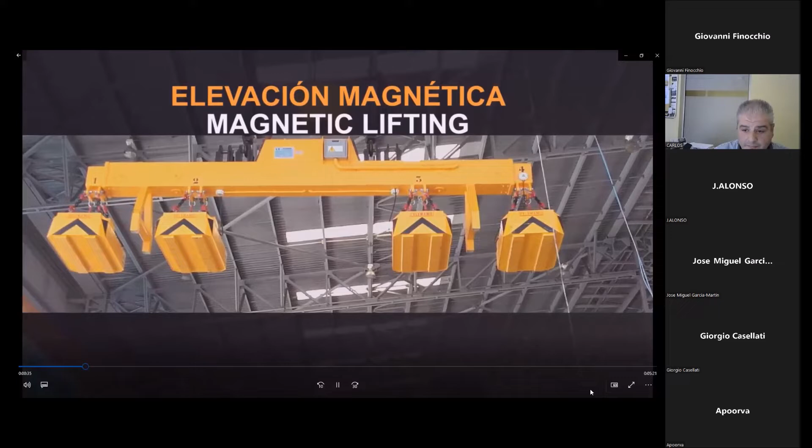So down in the bar, okay. You can see the video now. Yep. Okay.

First, I would like to speak about my personal experience. I graduated from university with a Bachelor of Engineering in the field of electronics. After 2 years, I was working for a company related to electrical industrial assemblies. I obtained a job interview with FELEMAMG, and it went well, and in a short time, I started working here.

Our work in the sales department consists of close contact with the clients. They usually call us with a problem which they want to solve, and we try to give a solution with some of our products.

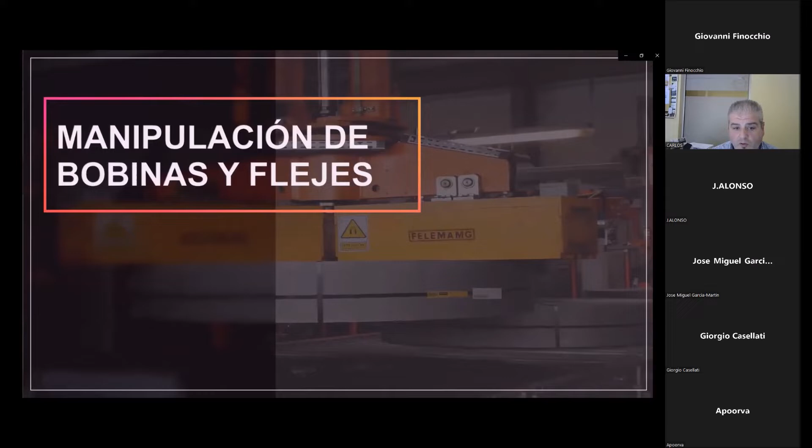These projects include a first technical advice with a visit or a virtual meeting, and after that we study the project and propose to the client a technical solution, which may be a series product or a new product designed especially for their case. This proposal includes a technical part and an economic part too, with all the prices and conditions.

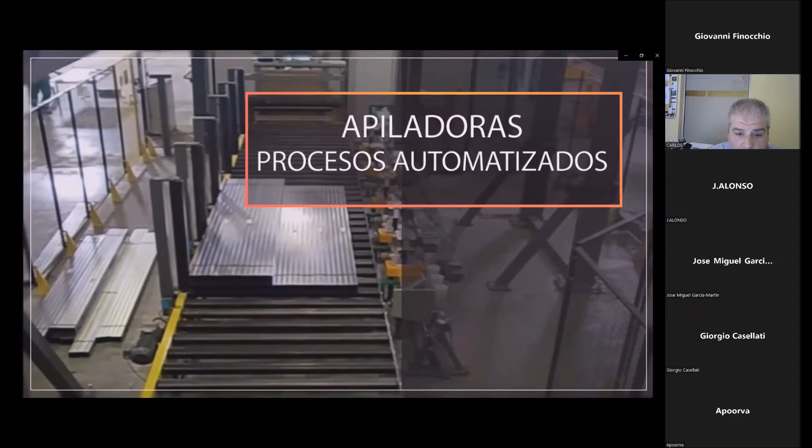If this project is carried out, we continue with the project all the time. This includes a lot of emails, phone calls, documentation, manufacturing reports, drawings, and so on. After that, I hope you have a notion about our job.

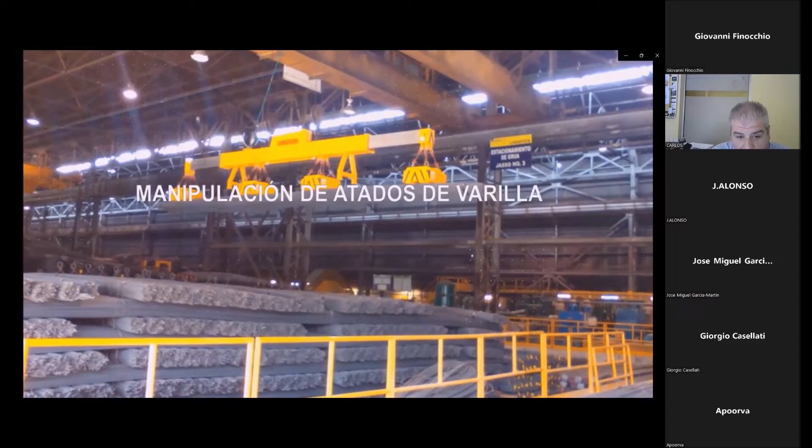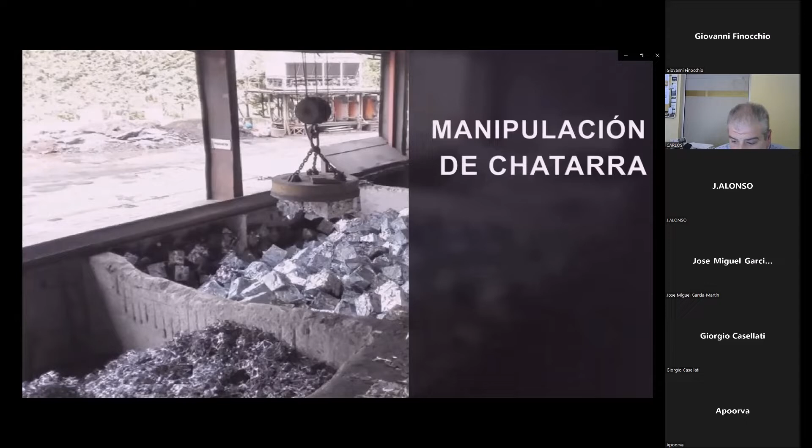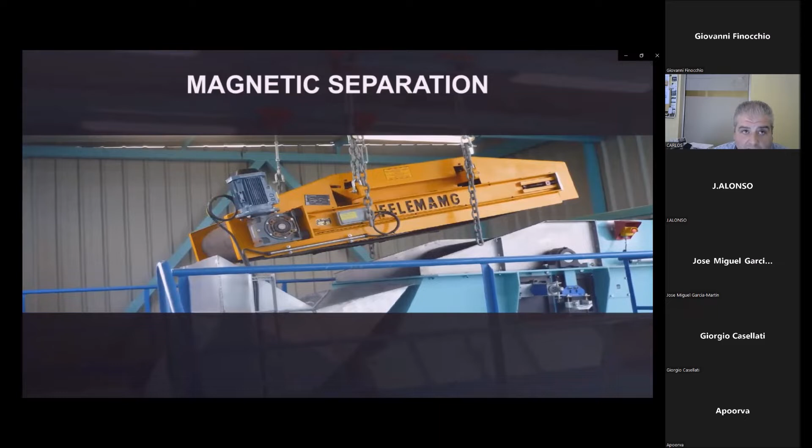I would like to continue with a general explanation of our company. Before continuing, it's very important to know that our manufacturing can be differentiated into two big fields: magnetic lifting, used to handle and transport heavy loads, very common in steel plants or foundries, and magnetic separation, to separate ferrous or non-ferrous metals from other kinds of materials.

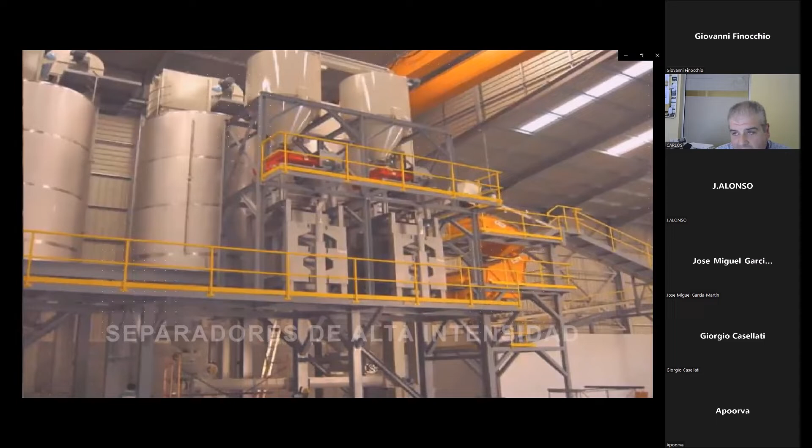Apart from these products, lifting magnets or separation magnets, we also manufacture other products for special applications, but they are a very small portion of our total manufacturing.

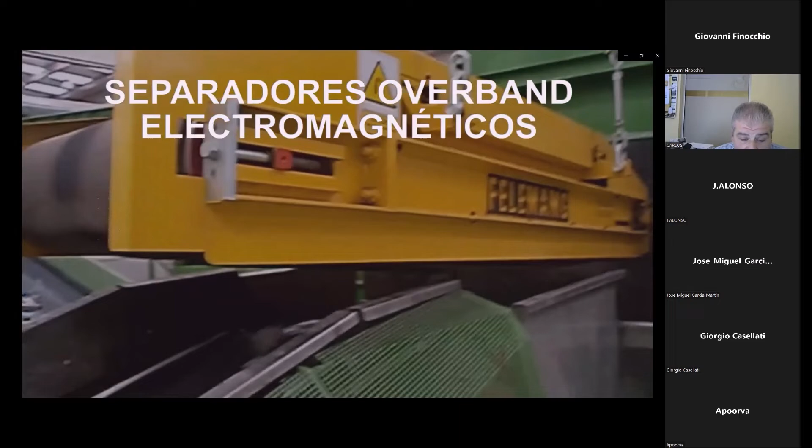FELEMAMG is a company situated in Gijón, in the region of Asturias, in the north of Spain. It's a very industrial zone in the steel sector, with different important companies, like for example ArcelorMittal, with two big steel plants close to us.

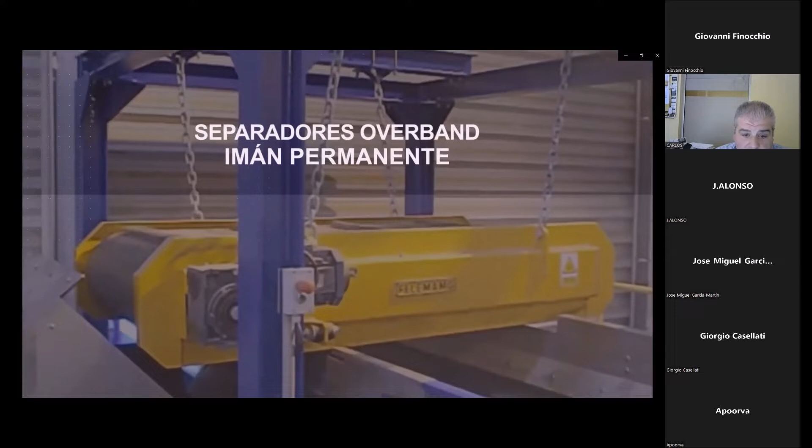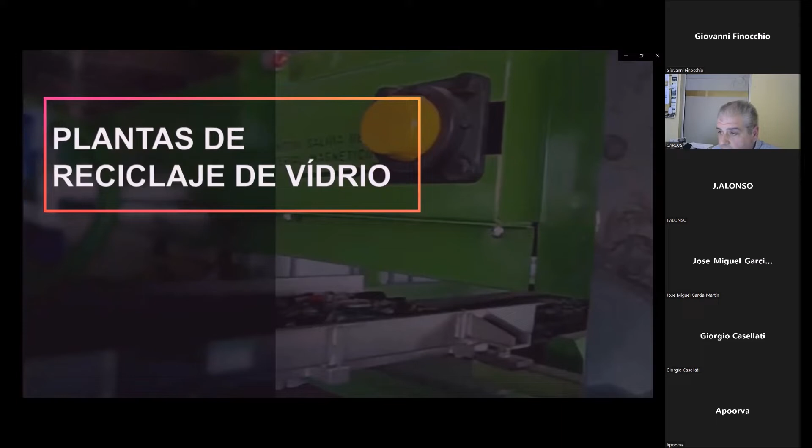Due to the great demand of the Spanish steel industry at the end of the 60s or 70s for new magnetic equipment, and for the repair of existing electromagnets from different world manufacturers, European and American too, FELEMAMG began in 1970 as a workshop specialized in repair of electromagnetic equipment, especially round and rectangular magnets for lifting loads.

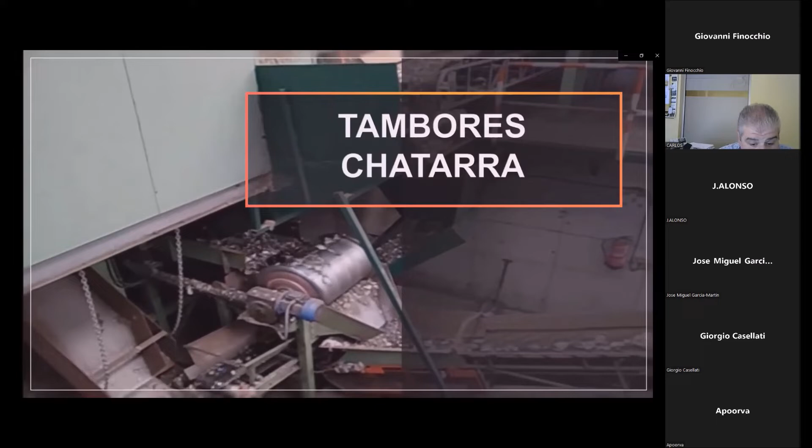At the beginning, we had great success with our electrical coils. They were very resistant to failure, and the market began to ask for our own products.

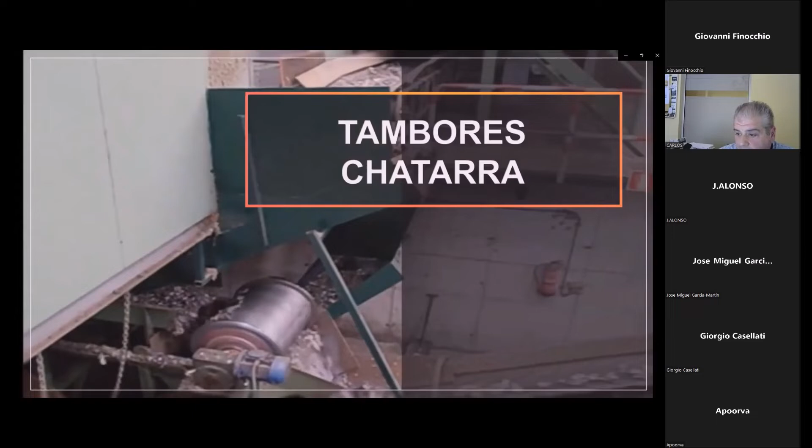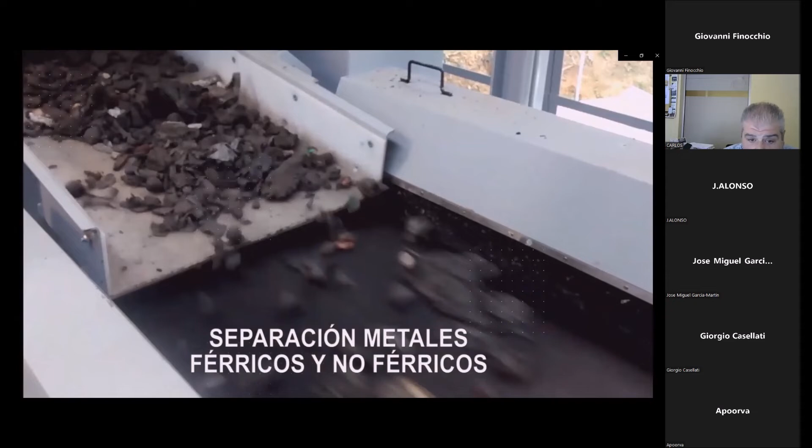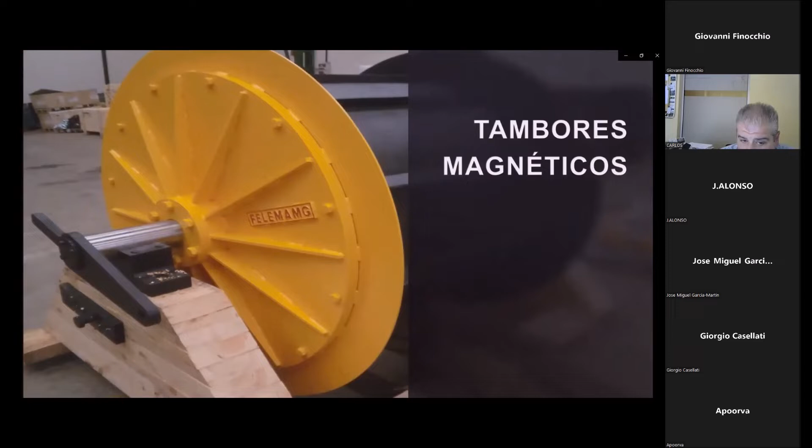We started with lifting magnets, and around 1974 or 1975, FELEMAMG started to manufacture electromagnetic separators, very used in several fields such as mining, recycling, and foundry too. Until that date, all magnets used for lifting and separation were electromagnets with an electrical coil.

But in a few years, around 1982 or 83, we started to manufacture magnetic separators with permanent magnets, first with ferrite blocks only. In 1989, FELEMAMG manufactured its first high-intensity electromagnetic separator for the mining industry, for cleaning sands, mainly feldspar and quartz.

And this is the most powerful machine that we manufacture, with a magnetic field of 21,000 gauss. In 1991, we started to use permanent neodymium magnets to manufacture medium and high intensity magnetic separators, usually to purify non-ferrous minerals.

At the same time, we also began to manufacture the first non-ferrous metal separator, usually called eddy current separator, mainly used to separate aluminium or copper.

In the 1990s, magnetic equipment called electro-permanent magnets began to be manufactured and used. These magnets are a combination of an electrical coil and permanent magnets, used for lifting loads with maximum security, because they don't depend on an electric supply to attract the load, avoiding the alternative system of batteries necessary when electromagnets are used.

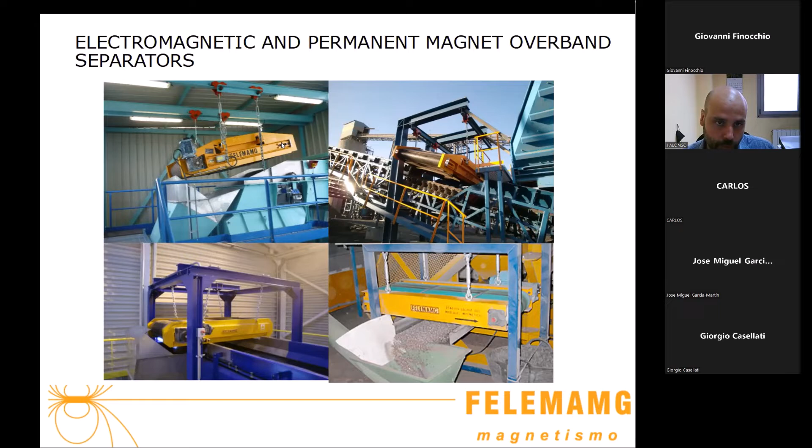This type of overband separator is very widely used in different sectors, like mining, for example, to protect the belts. They normally have very long belts that are very expensive to replace, so they want to take out any iron, big parts of iron that may be there, that may break the belt, to protect mills also, for example, and inside the recycling industry, also for cans, for example, or many other different applications.

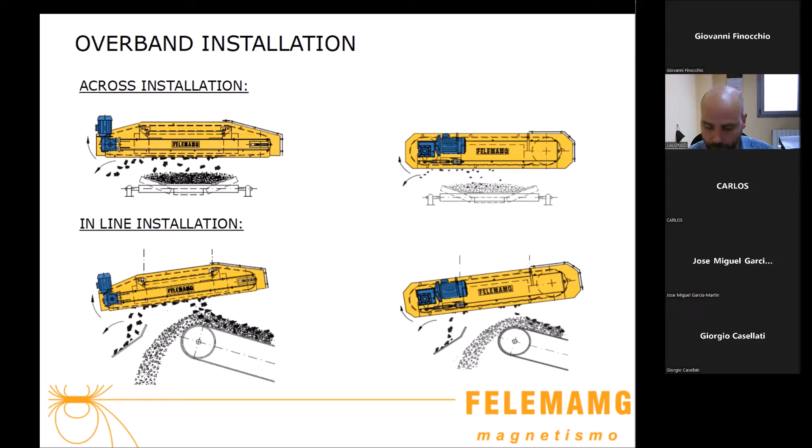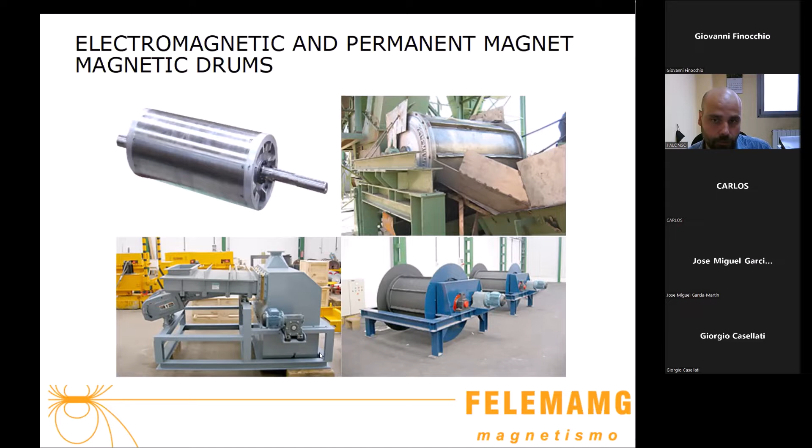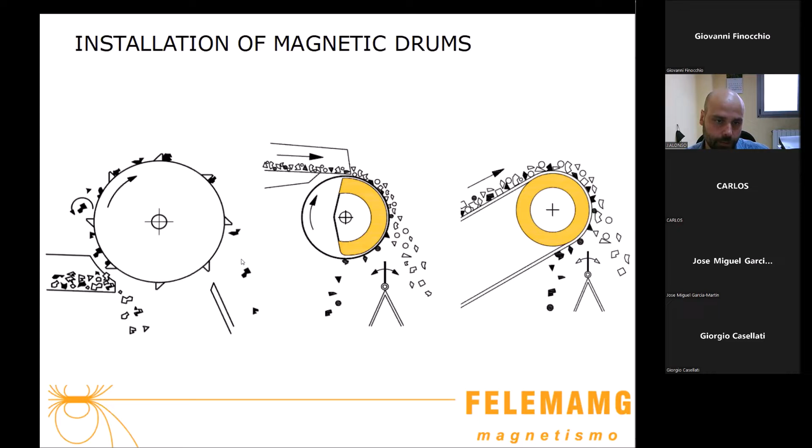Okay, so we also manufacture eddy current separators, as my colleague said, that's ideal for recovering aluminum, brass, copper, especially what is electrical, conductive, non-ferrous materials, as they are widely used in shredders, waste plants also, or recycling in general.

Here you saw that in the video. I don't know if you remember the video of my colleague Carlos.

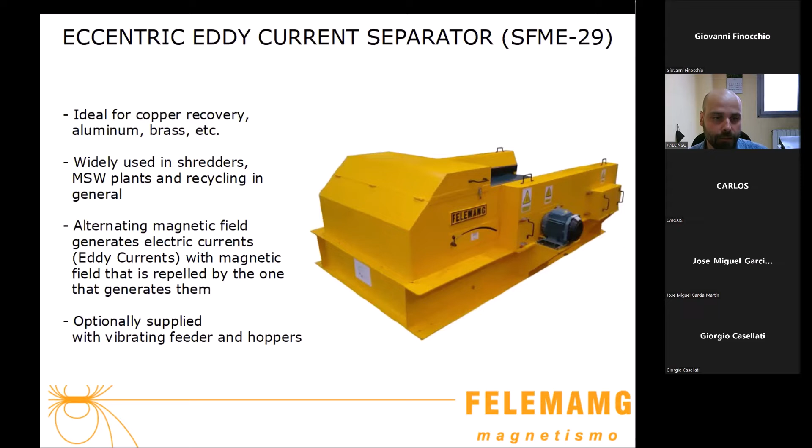Normally you feed from that part of the machine with a vibrating feeder, for example. And here you have a magnetic rotor that generates a magnetic field, and this magnetic field generates currents inside each piece of aluminum, called eddy current, with a magnetic field that is repelled from the field generated by the rotor. So it's repelled and it jumps, so you can separate and recover this type of material.

Here you can see more in detail. So here you have an eccentric rotor, and this will be, for example, aluminum that comes here, and when it arrives at the rotor, it generates eddy current that is repelled, so it jumps to that side. You also have a splitter that you can regulate to recover aluminum, copper, brass here. So it's a different type of solution because this type of material is not magnetic.

So it's a way to recover that. We normally supply that with a vibrating feeder that is shown here. We can put a hood for dust to reduce the dust, and also a chute here to have the aluminum or copper on that side and the rest of the material on that side.

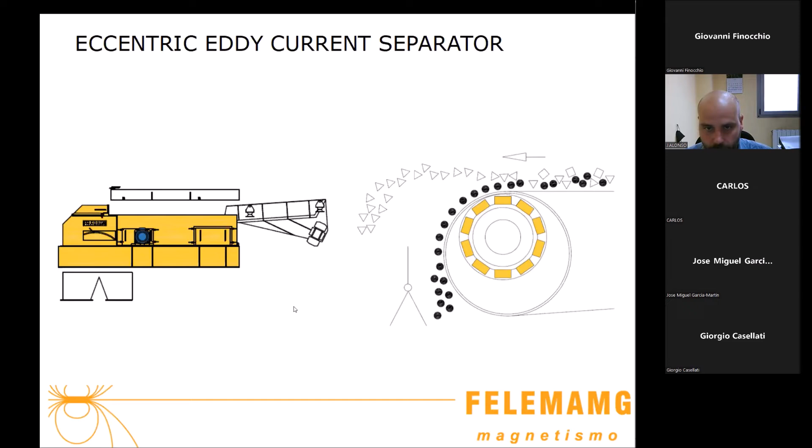You can see here that there is a hood here. You have a vibrating feeder in that way to open the material. It's good to have the material as open as possible in order to cover the whole belt, so you have a better separation here.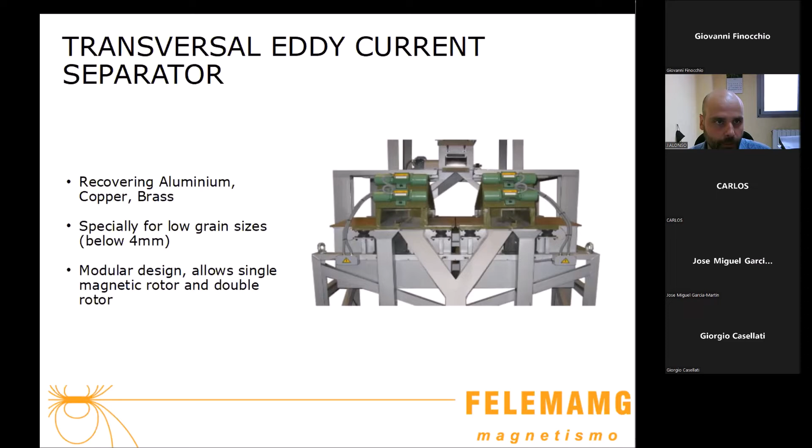Also, another type of machine that we manufacture is a high-intensity permanent magnets magnetic separator. As I said previously with the eddy current separator, we usually supply it with a vibrating feeder to open the material. It's important to have the material as open as possible to have a good recovery.

And here, this is a magnetic circuit, this roll, that has a high intensity and high gradient magnetic roll using permanent magnets. You can have up to 11,000 Gauss here. So you can attract weak magnetic materials and high quality paramagnetic materials also here.

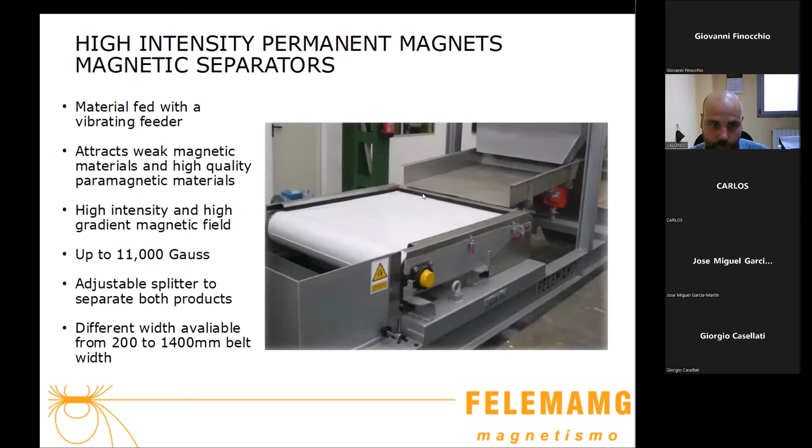Also you have a splitter here that allows you to regulate it. And we have different sizes that can go from 200 millimeters width to 1.4 meters width, depending on the flow of material that you need to treat in this case.

And this is a high intensity SFAI separator, an induced roll separator. The magnetic field here is produced with a coil, with electricity. In this case, this is the most powerful one that we have, we can achieve up to 21,000 Gauss on the system.

Here you have two of them, a double system. This system works in a cascade, I'll show you later. And you have a very high intensity field and high gradient magnetic field to attract paramagnetic minerals. These are minerals that have very low magnetism, you are not able to catch these materials with a normal magnet. You need a very powerful intensity to attract these materials.

There are many different materials that you can catch with this type of system, such as iron oxides, manganese, hematites, limonites, micas. There's a long list of different materials that is possible to separate with this type of separator.

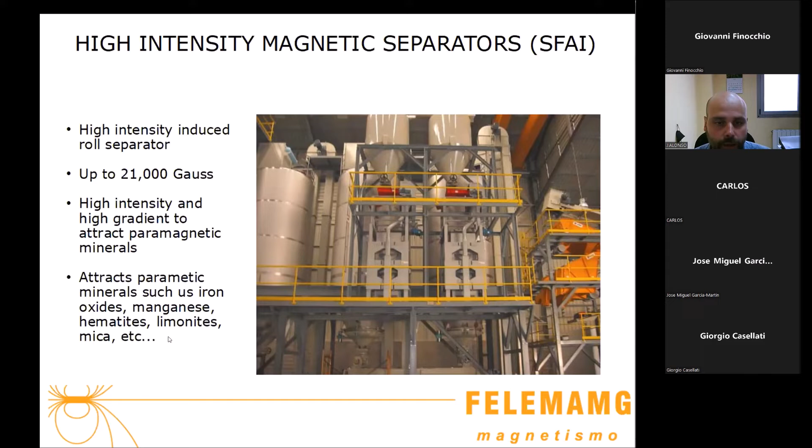Here you have a graph of how it works. We always supply them, we can supply them with a double system with two lines. And we can have 1, 2, or 3 rolls in cascade. In this case, we have only 2.

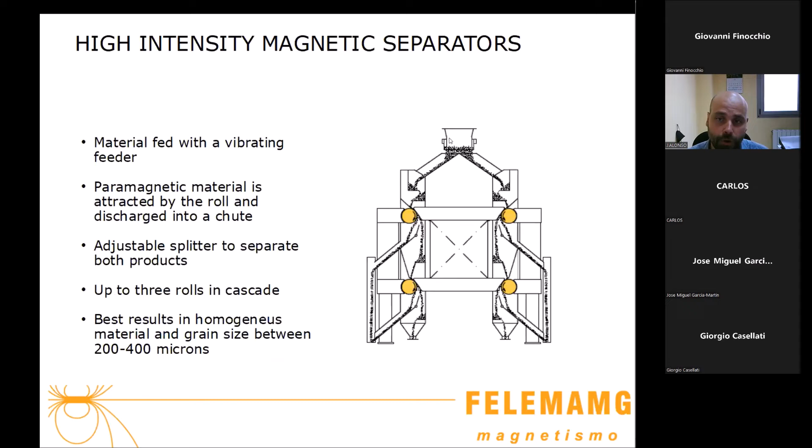The materials start with a vibrating feeder here, a magnetic drum. We always supply a magnetic drum of medium intensity to eliminate any ferric material, poor ferric material, because here the magnetic field is so powerful that if it attracts poor magnetic material, it can damage the roll. So we have this magnetic drum as a protection here.

And here you have also a splitter to divide the magnetic and paramagnetic materials, in this case that goes that way, and here that way, that goes to the same exit here. And the inert material goes that way.

And you can have also even another one to have even more purity at the exit of the material. And this one is double, to have double the flow rate.

These are also modular, you can have 2, 3, 4 of these machines one beside the other. The best results are for homogeneous material, grain size between 200 and 400 microns. This is very small grain size, to make sure that you liberate the particles that you want to separate from the others.

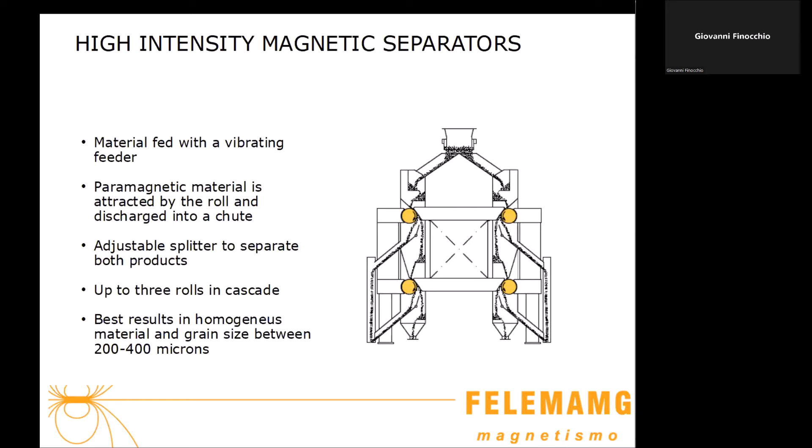Okay. So I already explained a bit about some of our separating equipment. Now I'm going to explain a bit about our magnetic lifting equipment. Okay, just one second.

So I will speak about round electromagnets for scrap or other types of applications, rectangular electromagnets for plates, for example, and electro-permanent magnets. I will also explain a bit the differences between electro-permanent magnets and rectangular magnets, as I said before, and special electromagnets, as I said previously.

Round electromagnets, we have different series here. CN is the light series, the typical one for scrap. CS is for steel mill, a more robust type of electromagnet with a double bottom. The second bottom that is inside makes it waterproof, so you can even put it in the water.

We have a special type of round magnet that is possible to put inside the water also, special for high temperature also: the CST, CSR with reinforced steel, even more reinforced round magnet for breaking balls, for example, when the type of work is very heavy duty. And also a special one for high amounts of light scrap.

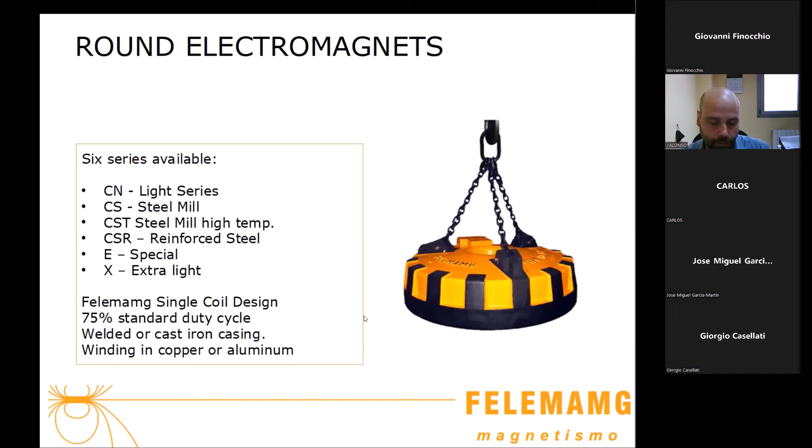You can knock the coil with a hammer and it resists the knock of the hammer. 75% standard duty cycle, and it can be welded or cast iron casing also, and we can manufacture the winding with copper or aluminum, depending on what the customer needs in this case.

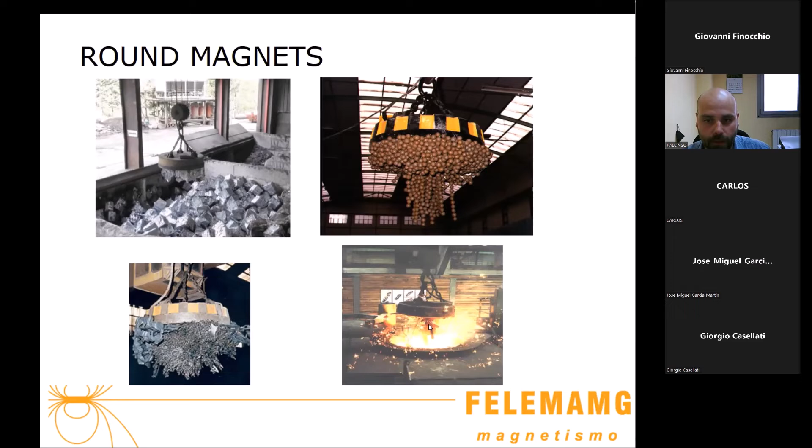And here we have rectangular electromagnets. They are normally used for handling plates. They are usually supplied with a beam that allows lifting long plates. This beam can be a fixed beam, or can be like this one that is electro-hydraulic, a telescopic beam that allows opening and closing to adapt the beam to the length of the plates that you want to move.

Depending on if you change the dimension of the plates, you can move it quickly to adapt to them. Other ways, more simple to do it, is this one, for example, that uses the hooks of the crane to open and close the distance between the magnets. It can be 4, 5, 6, depending on the length.

You can have even 8 magnets if you need. The longer the plate, the higher the number of magnets that you will need. That is quite usual to have in workshops or warehouses and some other places.

I have to say that all the lifting equipment that we manufacture, we supply with a modern electric cabinet that allows great control of the magnets, with a constant current power supply using a thyristor controlled by a microprocessor. That improves the safety of the installation and also the life of the magnet. Also, you have control of the magnet temperature, and protection against overheating, short circuit, and overcurrent.

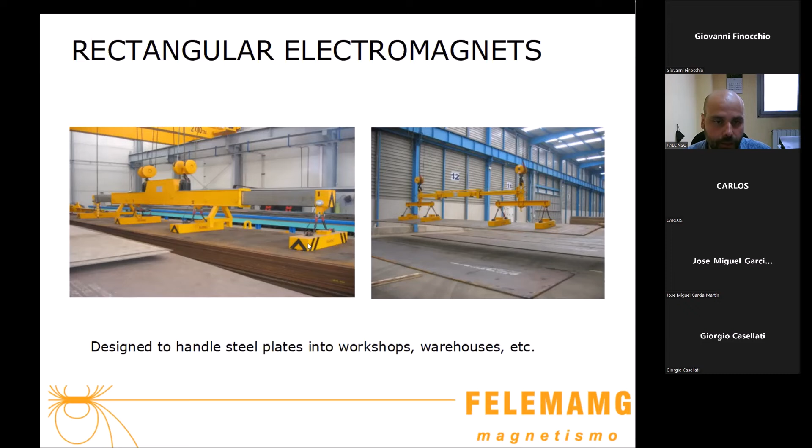So now I'm going to speak about electro-permanent magnets. Externally these are very similar to electromagnets, but internally they are quite different. We can see a schematic of this type of electro-permanent magnet. There are two types: deviation electro-permanent magnets, and commutation. As I said, externally they're very similar to electromagnets. But for example, the deviation electro-permanent magnets have magnets that cannot change polarity. You have south here and north here, and it's always defined when you manufacture this type of electromagnet.

So when you don't need any current, it works and picks up the load without current. You have a coil here, and when you put some current through this coil, you make a deviation of the magnetic field. Instead of going through the primary path to pick up the load, it goes through a secondary magnetic circuit. So you deviate the magnetic circuit and can drop the load without problems. This is the system with the deviation electro-permanent magnet.

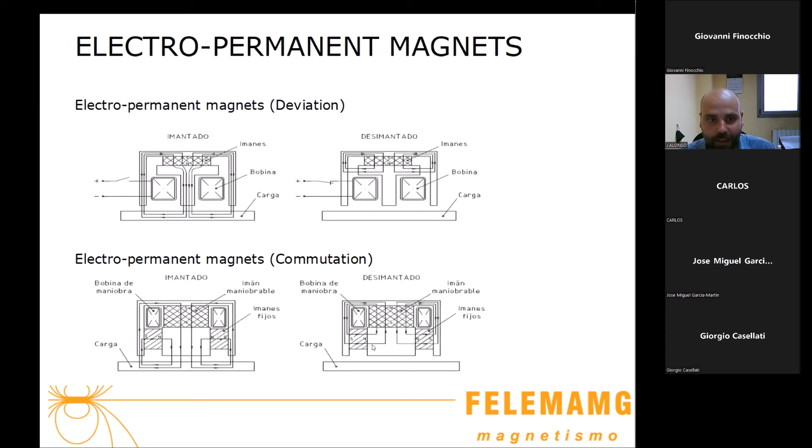I hope that everything is clear and that you understand everything I've said. I hope so.

This is a picture of electro-permanent magnets. As I said before, externally it's very similar to the other one, but internally it's quite different. This type is also used a lot in shipyards, for example, to move big plates for ships.

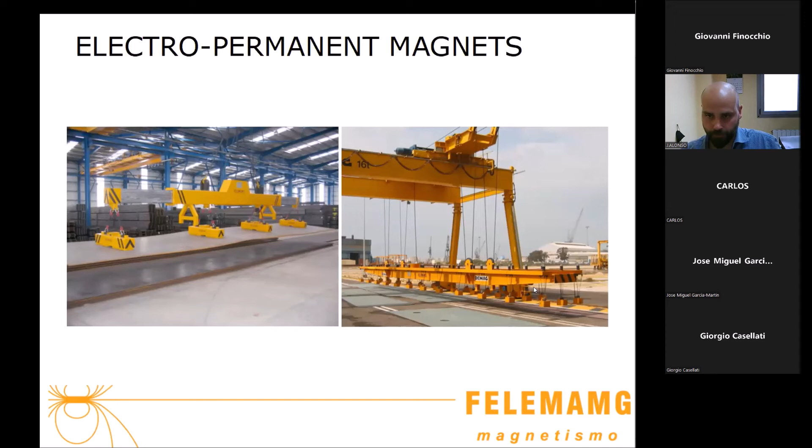Now I'm going to show some special types of electromagnets that we also manufacture. This is the FSRV magnet, special for handling rod bundles, rod bar bundles. You define them according to the number of bundles you want to manipulate in each lift, making it longer or shorter accordingly, and the number of magnets needed depends on the length you want to handle.

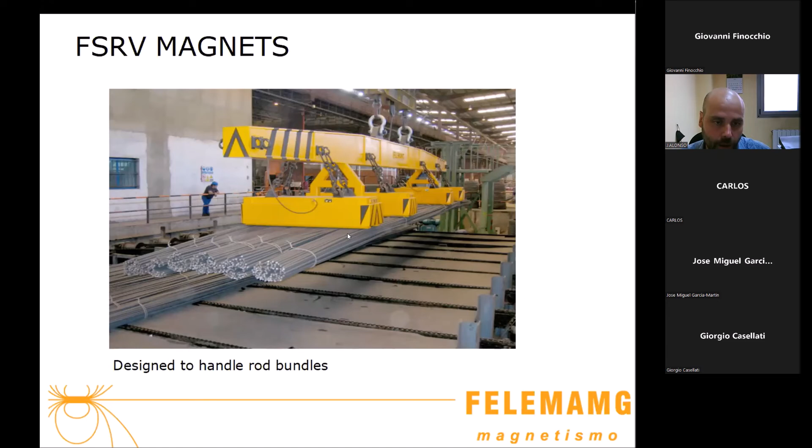This type of magnet has a deeper magnetic field to make sure that at least 60% of the diameter of each bundle is picked up with magnetic force, so the steel straps don't suffer too much. Each type of load needs a different design of the magnetic circuit - for example, one might need a much deeper design than another, depending on the type of load.

So let's see next. For example, this one is an FBD magnet. This is massive, it's for handling billets. This is a massive piece of iron here. So you don't need a very deep magnetic field to have a very big lift. It's more superficial, this one, and it can be manipulated.

This type of load can be manipulated with electromagnets or electropermanent magnets, but electropermanent magnets only allow handling cold billets. If you want to handle hot billets up to 600 degrees, it has to be with electromagnets, because one of the problems electropermanent magnets have is that they don't allow too much temperature. The magnets inside don't allow you to heat up more than 120 to 150 degrees normally.

Here also it's supplied with a beam and also 2 magnets, or depending on the type of installation, you may need more magnets. But usually for this type of load, because it's a very rigid load, you will use only 2 magnets, okay.

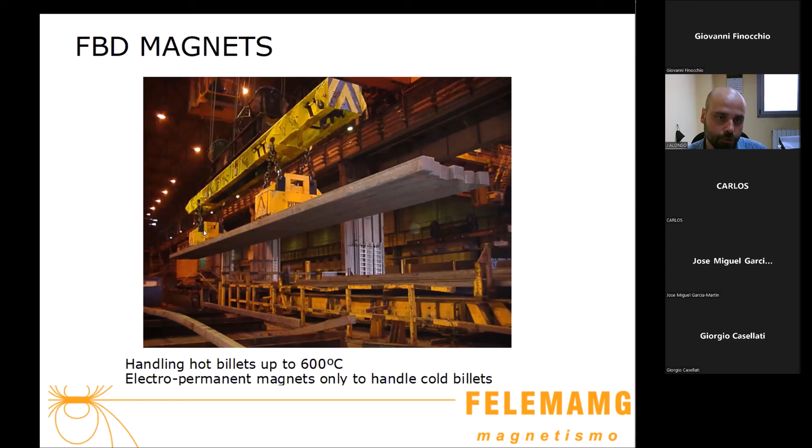Other type of system, FPTM magnets. This is a special type of magnet, tripolar electromagnets, with moving poles.

The poles, that is the part of the magnet in contact with the load, is like a slide, in different parts. It's adapted to the load, as you can see here in the profile bundle. It has the shape of the load, so you have a higher surface here in contact with this load, so you can lift this load without problems.

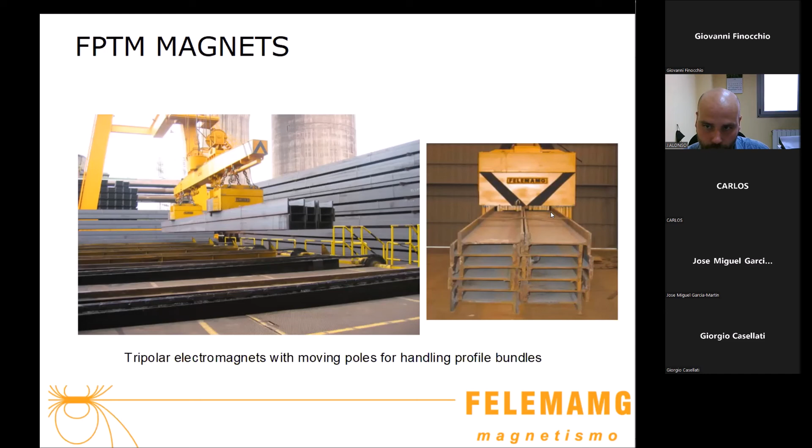Otherwise you will have more problems to load, because it's difficult. You have many different shapes here to lift this load. Okay, so this is a special type of load also.

Another type is for tube bundles. Here again, you have a deep magnetic field to reduce the effort of the straps here. This type, for example, you have this beam that you can move around to move 2 bundles of, for example, 6 meters, 2 bundles at the same time. And when you have a long bundle of 12 meters, for example, you can move these 2 magnets and these 2 to have the line all together to handle 12 meters of tube bundles.

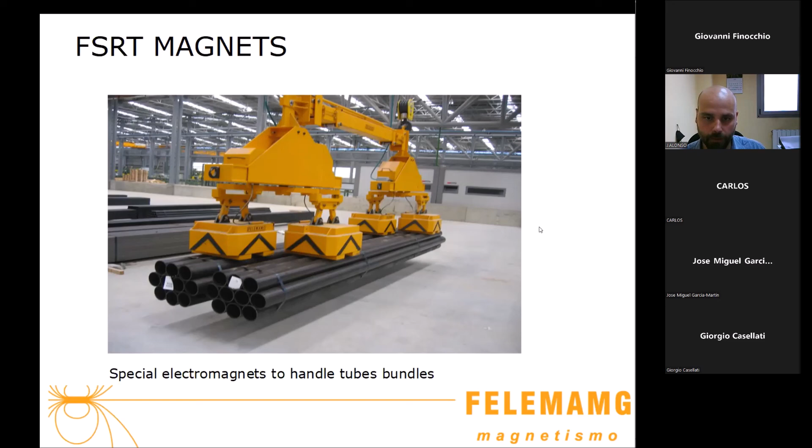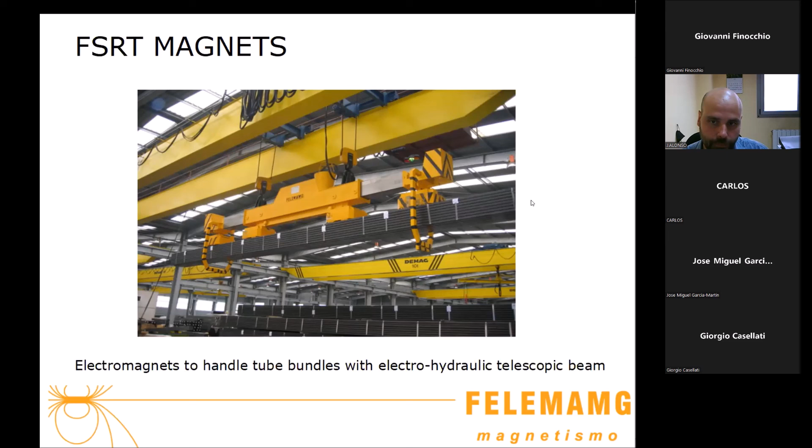Another type also for square tube bundles, also with an electro-hydraulic telescopic beam, and you can have even more security if you want, using security arms here for even more security.

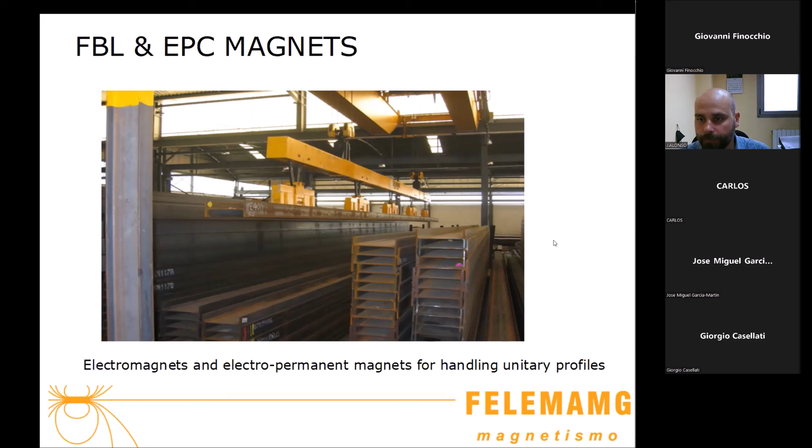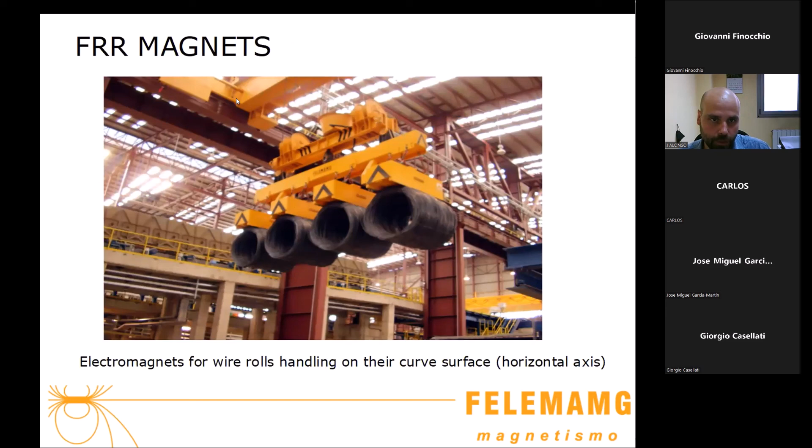Magnets also for handling wire rolls, as you see in the curve surface, special type. Also, you can have 4 at the same time, 2 at the same time, with the beam and whatever you need to handle. Also, as I said before, we always supply the electric equipment to control them with all the securities.

Special square and rectangular electromagnets, special for scrap handling. These are very big magnets, maybe 2.2 or 2.4 meters length each side of this magnet. You can have 2 of them for high capacity scrap handling, okay.

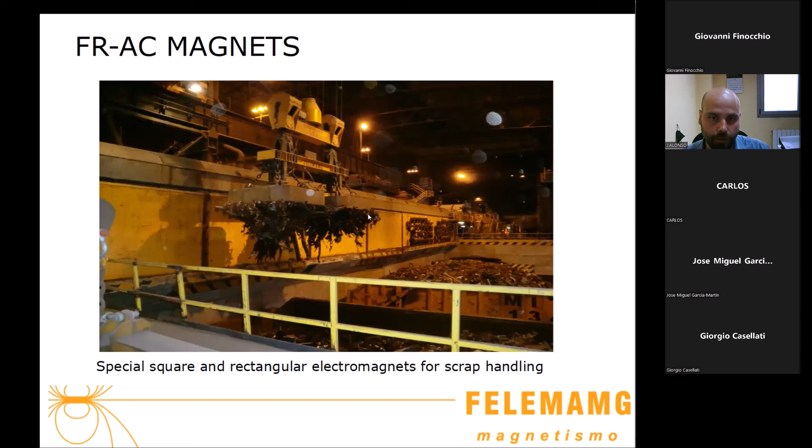FES magnet also for turning the slab, that is something they do in some of the steel mills. So you have a powerful magnet coil in the middle, smaller ones here. You lift here up until you arrive at the main pole, and you can turn it around. Okay, there are many different types of systems.

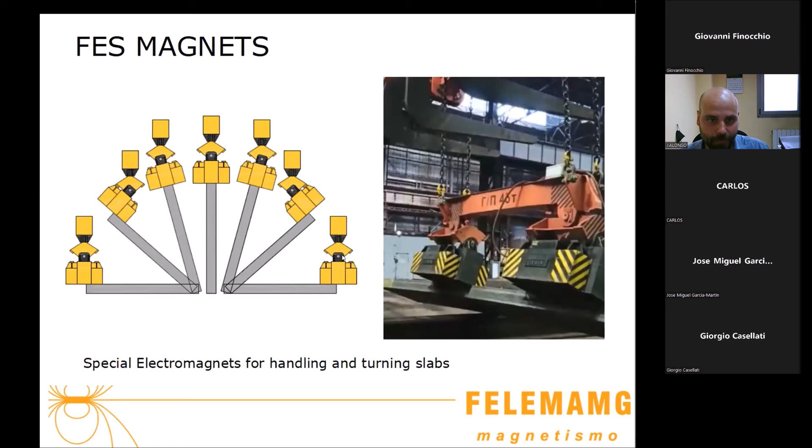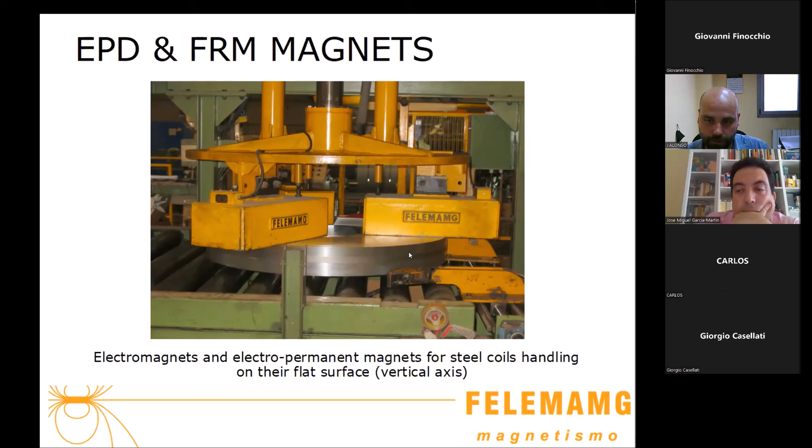Electropermanent or electromagnets to handle steel coils on the flat surface also. Normally here you use 3 of them or 2 of them. For this type of system, the most usual are electropermanent magnets, because normally it's an automated system usually. So you use electropermanent magnets of the EPD in this case, that's the usual one.

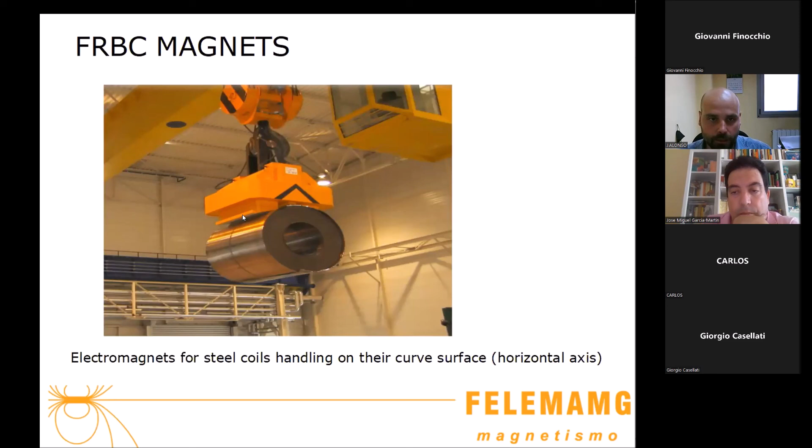And coils on the curved surface also, you can lift coils up to 30 tons with this type of electromagnet, with a sensor of proximity in order to reduce any problems with the coils. So yes, there are different applications. I think I finished.